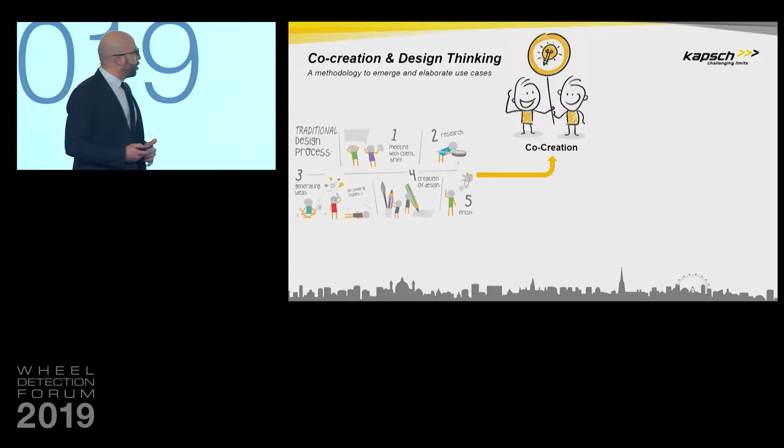And design thinking is the complementary solution. It's more internal, how you design your product here. If I try to summarize it, make it short, it's like if you want to build a plane, you do it while flying, on the fly. It's a bit dangerous for aerospace, but maybe safer for railway. And those two things, both together, bring the ability to have use cases emerging.

And that's crucial. And so my digital twin here wants to pass you two main learnings from the past co-creation and design thinking experience we have with our customers. The first one is for all the railway players. So dear railway players, please don't expect to have the full use case understanding before starting. This will never happen. So you have to start small. You have to start with some basics and engage the ecosystem so that you can move forward and have the use case emerging. And most of the time, it's not landing at the place that you expected.

That's the first learning. The second learning, and here it's more for solution providers like we, Kapsch, are: fail fast so that you can succeed quicker. It's really important here. We are talking about what we call minimal viable prototypes. Instead of waiting to have a minimum solution to come to the customer to start to experience it, you go with the very basic one and you provoke the feedback so that you can adjust the product and you can fail faster so that you arrive with the right product addressing the right use case.

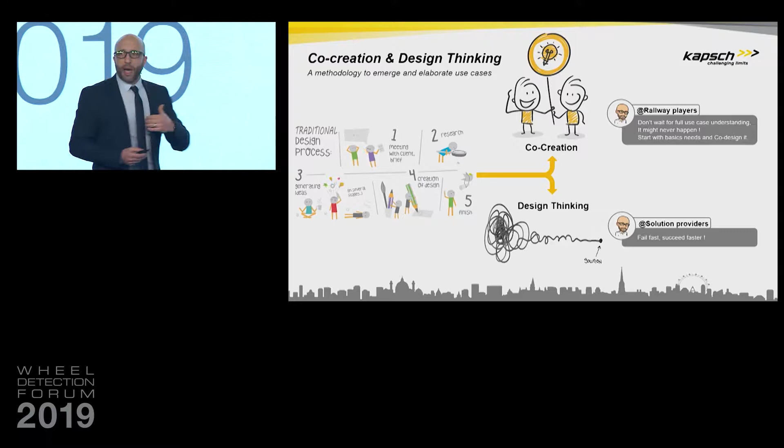So these are the two learnings I wanted to share, at least from the methodology perspective. So this is about how to have use cases emerging. Now, let's talk about the second question. What are the obstacles? So here, the only thing I can do is to share the experience that we have, our vision about the obstacles which we have in between the two sides. So let me customize a bit the picture here.

The first one is connectivity. It's not a secret that the wireless public coverage along the track is really poor. In France, it's around 40% of the track that is well covered by public networks. And it's not going to change because of business logic here. So connectivity is the first major challenge here. How to have connectivity along the track on a train that is moving inside the tunnel. This is the first thing.

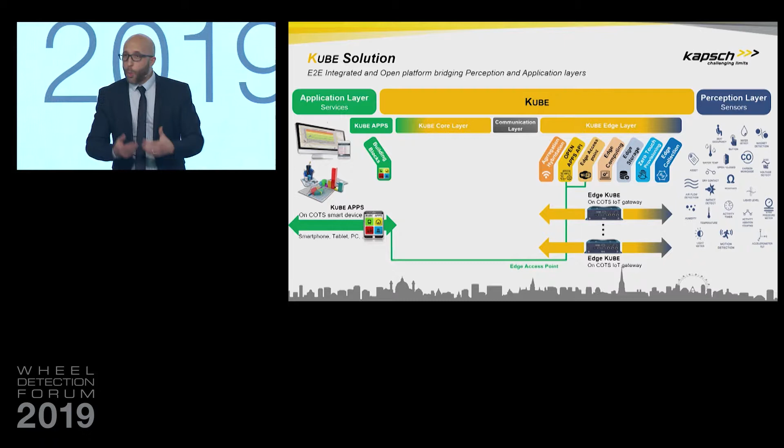It has the operability aspect with the zero-touch provisioning. It has a local database, and that's key also. It's not just a blind gateway that takes the data and sends it out. It stores the data locally, and this is one of the aspects of the mission criticality of the data. We're not allowing to lose any data here. And you have also the edge access point and the open API here, in green, which enables you, if you are 100 meters around the box, to connect with your smart device through Wi-Fi and browse all the data that have been collected by this box.

And then you have the core layer. The core layer is just a software that supervises all the edge instances and has the super database, the master database. It has the sum of all the databases from the edges. So you can also access with your smart device from the core Kube. And there, the only difference is that you see all the data from all edges.

And what is important here is the communication layer here in gray. The Kube aims to reuse the available and existing networks, whatever it is. If you have 4G, it has 4G connectivity. If you have 2G, it goes with 2G. If there is Wi-Fi, it goes with Wi-Fi. It is even capable to go over GSM-R technology, which has perfect coverage wherever it is installed in the rail environment. And this is the last feature here, the aggregation and hybridization here in orange, which allows to make the best of all the available connectivity means.

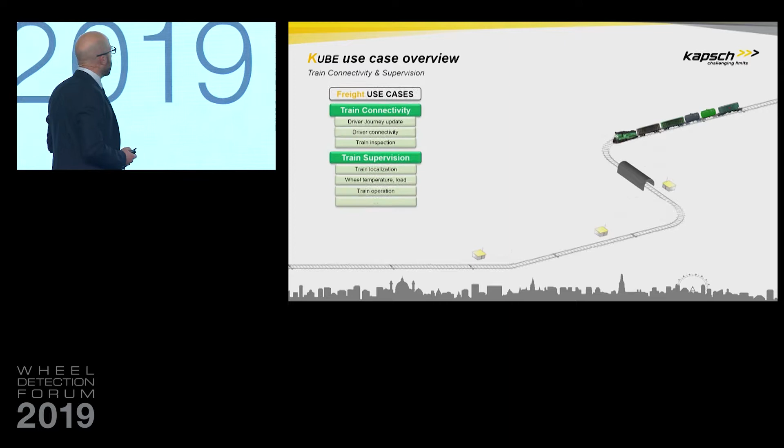So let's go now into the use case. And I will just not go with my digital twins again, it's speaking too much. So we are considering freight use cases. There are two use cases we can consider here. Provide train connectivity for the driver, for the staff operation who are managing the wagons and so on, to access any apps, to store any data, to collect any information. And also train supervision, so to have sensors in the train and to collect those data. So you have a loco here and some wagons.

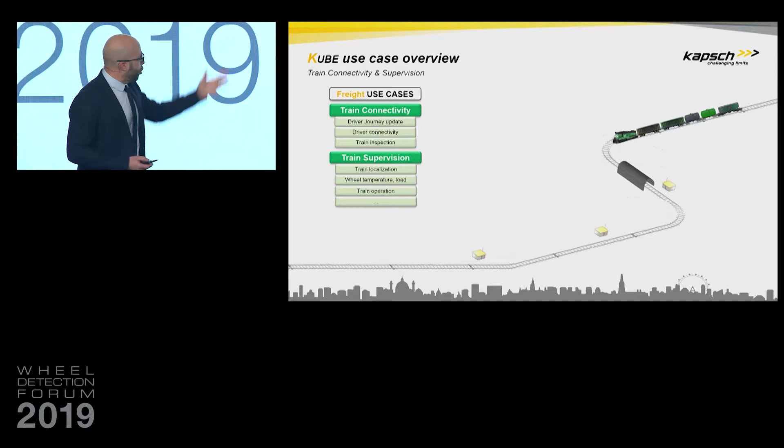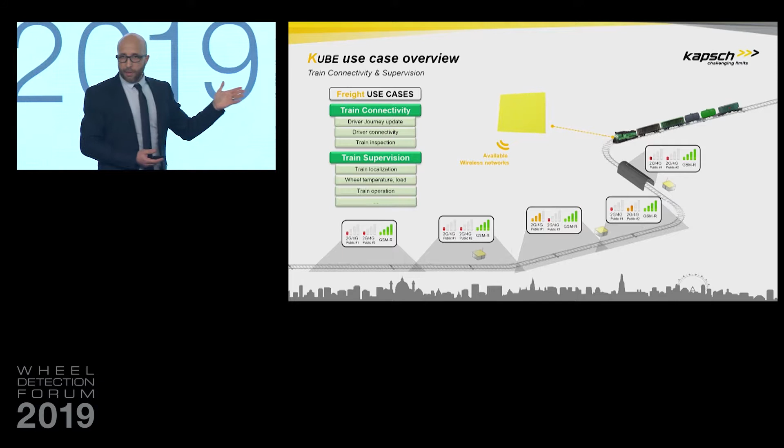So you put a Kube inside, and then on the journey, on the path here, I just illustrated the connectivity. You can see I've taken an example with two public network coverages and GSM-R. And obviously, GSM-R has perfect coverage because it is really on purpose along the track. So then the Kube is taking the best of it, and sometimes even the sum of it, and provides this connectivity to the driver thanks to the Wi-Fi access point directly with this smart device. So this is one aspect.

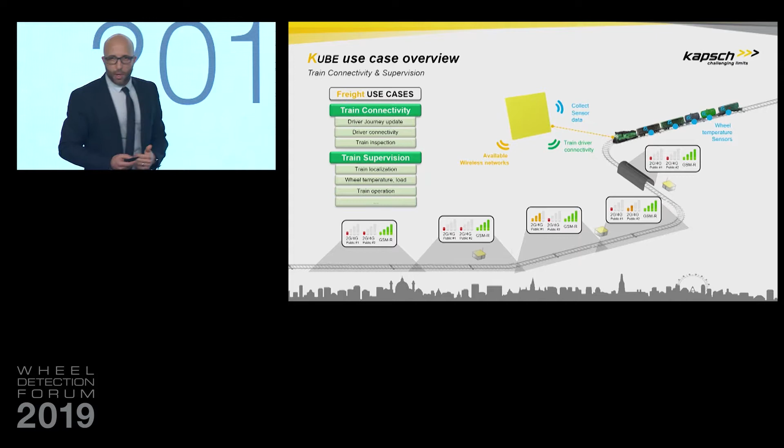Another aspect is that you can put sensors into the wagons, connected through whatever technology, and it connects to the Kube. It processes the data, stores it, makes it available for the train, and sends it over to a central point. Let's go a step further on the use case here. This is a recent use case. We work with one of our freight customers. They are transporting petrol, and during the journey, it happens that the petrol is stolen.

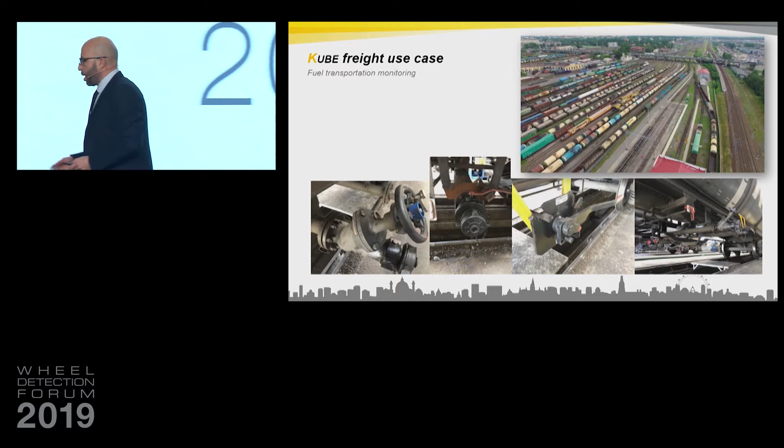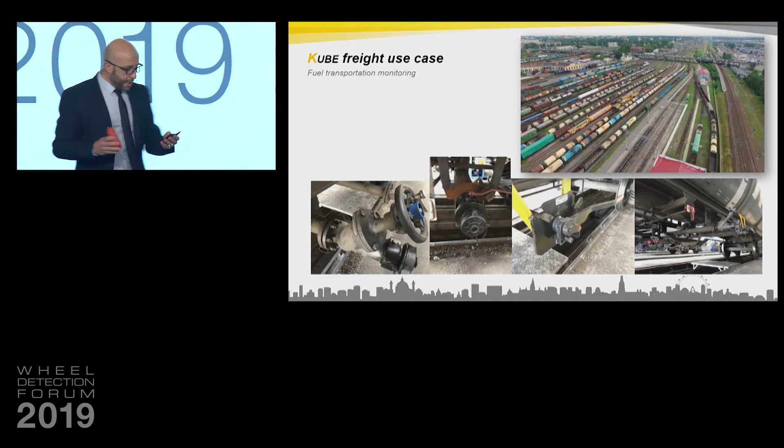So they want to monitor all the wagons, and they start thinking, OK, we need smart valves. But unfortunately, there are so many kinds of wagons that this is not affordable. So what we suggested is to use a padlock. It's a smart sensor, so you can lock any valves. It's connected through LoRa, so you can monitor whether it is locked or unlocked. You can remotely lock or unlock it. And whenever it is cut or broken, you also have an alarm. So this is the device that we put on the wagons.

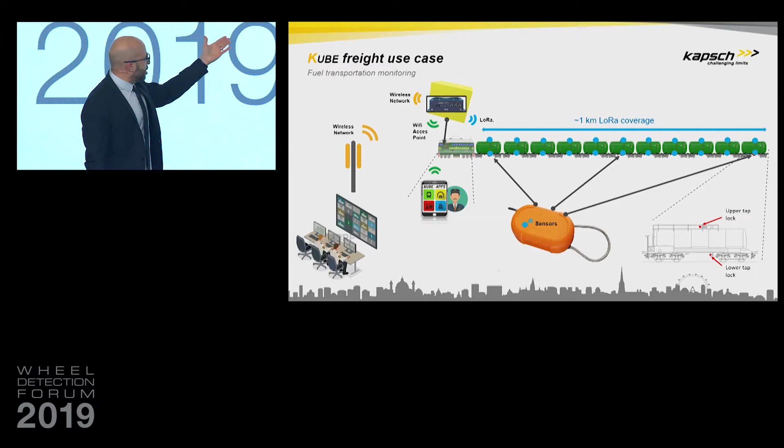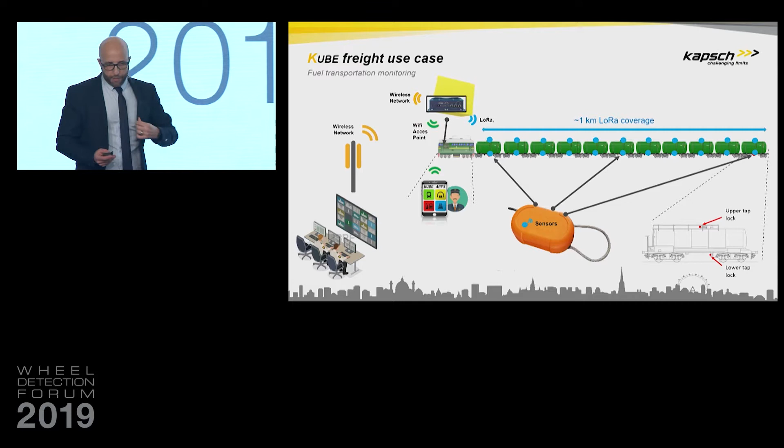The train driver can access this interface directly through the Wi-Fi access point, or it can be reached centrally through the wireless network from the operation center. So this is a use case. And again, my digital twin will complain because there was one unexpected challenge, which was connectivity over the length of the train. It can be up to 1 kilometer long, and it's not easy to reach the last wagon from the loco through LoRa. So we had to tweak it a bit, but finally we made it. It is now under trial experimentation with the customer. Again, co-creation. So that is a concrete use case.

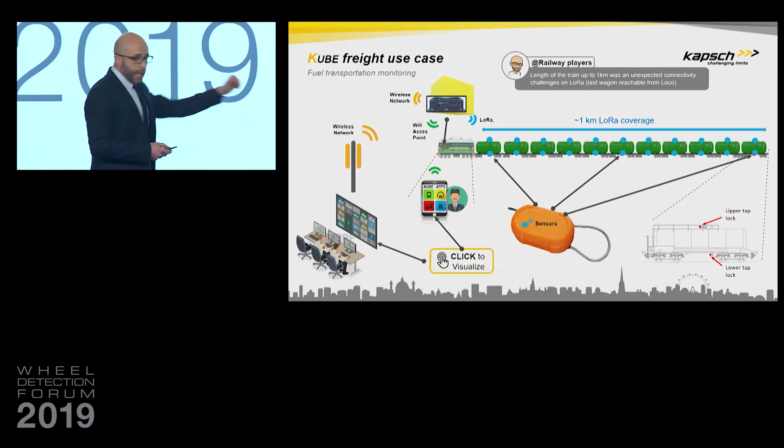And now I have 50 seconds to conclude. I will hand over to my digital twin, who will tell you what you should remember from this presentation. The first thing is about co-creation and design thinking. I would say three keywords: start small, don't wait for the full use case. Fail fast, succeed quicker. There are different approaches now to address the use cases and the various needs.

Second is the IoT railway challenges. There are IoT railway challenges, although it's not something I heard in all the presentations here. The reality is that it is not easy to collect the data. So with the Kube, we want to address this and put all the knowledge we gathered from telecommunication, GSM-R technology, and so on, into this field. Thank you.